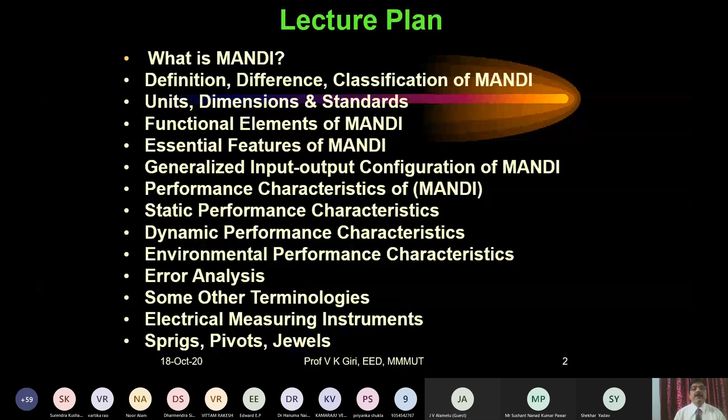Let's start with what is M&I. If anybody asks what is measurement and instrumentation, this is the very first question coming. Or define measurement.

Define. First of all, because throughout our life we have come across, I don't know how many things we have defined, and we have crammed those definitions. How to define the definition? What is the definition of a definition? This is my first query.

How to define definition? We are talking about so many definitions. We were busy with this since our school time. So definition, what I come to this conclusion, is a universally acceptable sentence or non-controversial sentence or paragraph, is known as a definition.

A sentence acceptable everywhere. So that becomes important for this subject, measurement and instrumentation.

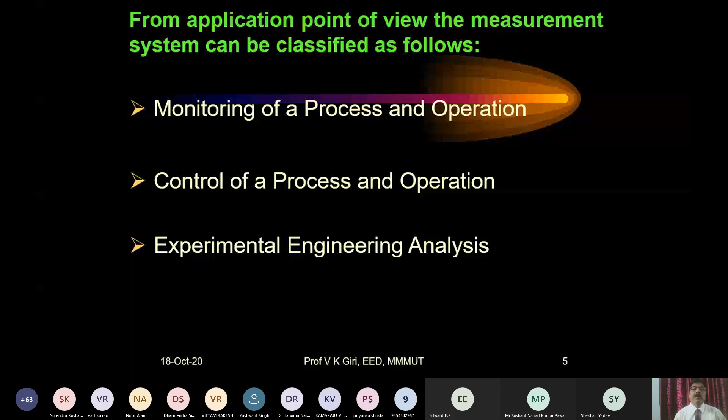From the application point of view, first is monitoring of a process. Monitoring of a process can be explained like this, suppose...

Is it visible? Please, I am checking with the audience. Yes sir, things are going smoothly. A little bit of delay is there, but okay, I think that's fine. So in that I cannot help. Okay, I will try. Otherwise things are visible. Yes sir, perfectly all right.

So this is the monitoring of a process and operation, this is the first classification. See, in some of the applications, monitoring means in your house, what it measures is energy. The energy meter is monitoring the consumption of power over a period of time. How much energy you cannot do anything with that one. Consumption is there, a meter is rotating, and a person comes after a month or two and takes the reading. So monitoring means just you are watching. There are so many terms - when I used to take the class, I used to tell these things. Monitoring has resemblances to observation, watching, monitor, TV monitor. We are monitoring the TV monitor, we are computer...

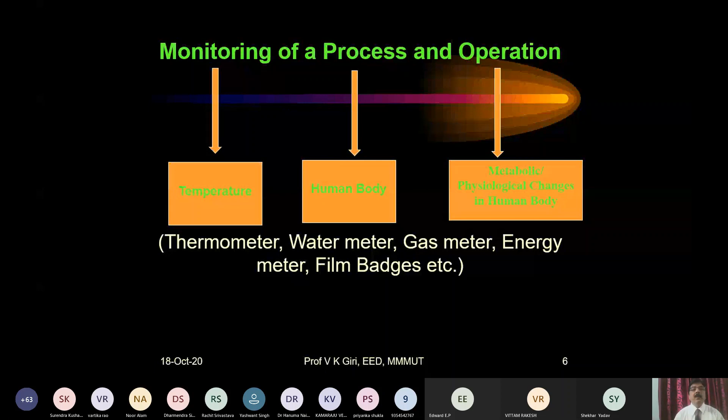Now another is the control of process and operation. As you know, we are mostly talking about the closed loop system. Example - here I have taken the control action of the measuring instrument. Suppose the room temperature has to be maintained constant, or any process temperature has to be maintained constant. So again we will use a temperature measuring device. Here we will be using a thermostat, whereas previously we used a thermometer. So the measuring instrument will be the thermostat, acting like a control device, and there is a process.

Suppose this is the process, so disturbances have to be accounted for, and there will be a set point. As the set point, let us say you have set it at 20 degrees centigrade. Just after 20 degrees, if it goes beyond that, the final control action element will take action, and the compressor will be on or something like this. That is how it will be maintained constant - if switched off, it can be switched on again, so the temperature can be maintained.

So here you see the same measuring device, the temperature measuring device. Earlier it was a thermometer, here it is a thermostat. But in that case it was not doing any control - in the previous case it was just monitoring. Here it becomes control. It's just like daily we watch TV and there is a weather forecast - we get a forecast of the weather. Suppose there is a forecast like a coastal area will have a severe tsunami or something - for us, that is a monitoring process.

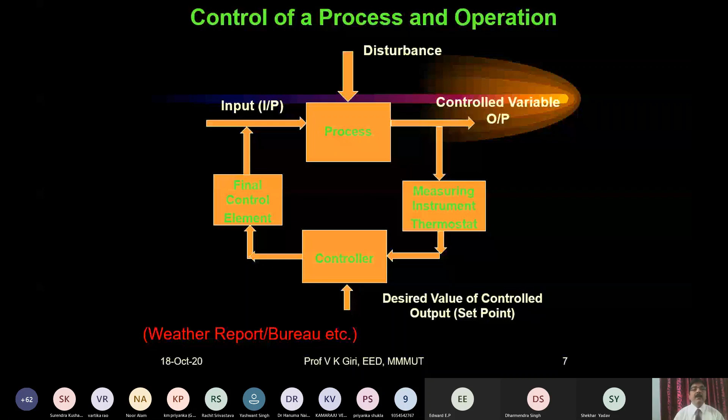Then the third, experimental engineering analysis. This is all about simulation and experimental work, which we call it. So there are two types of approach to solve any engineering problem: theoretical approach and experimental approach. Now always there is a discussion about which should be preferred and why.

So the theoretical approach means simulation. Most of the time nowadays students are doing all the simulation work. The experimental approach has its own advantages and disadvantages. The best problem solver is the person who...

If you could have developed the experimental model of this one and then gone for the simulation, it could have been a very good work. So this is what it means—both have their own advantages and disadvantages. It's best to consider both things together.

For some things, there is no other option, like determination of yield point, friction factor, or speed torque characteristics. So there you have to go for the experimental approach.

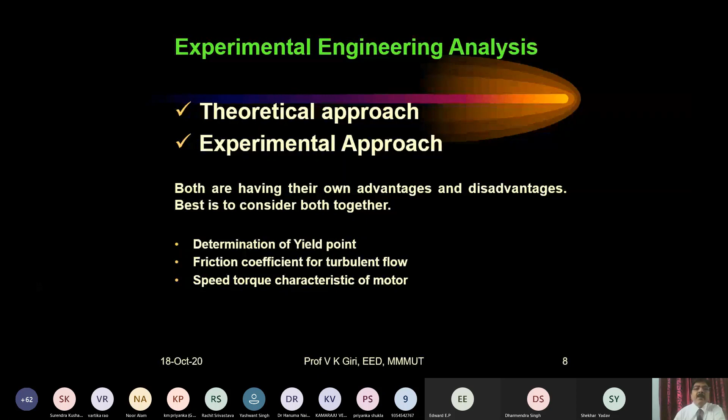Now switching over to the types of measurement, or methods of measurement. Again, this is coming under classification. There are two types of method.

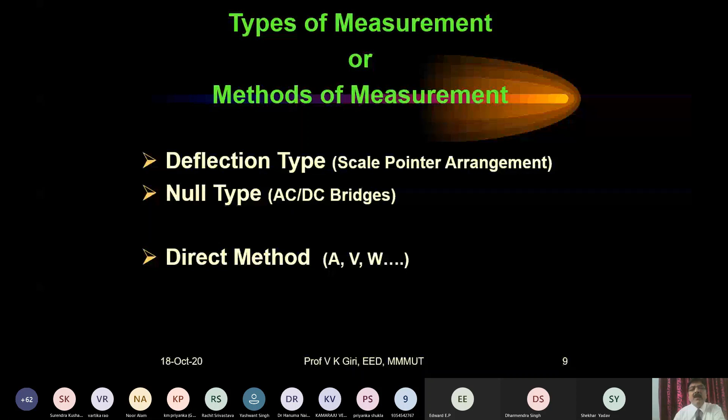Null type method means AC/DC bridges. I will not go into detail because you are all professors and you are dealing with the direct method and indirect method. These are the very local methods of classifying the measurement or methods of measurement. The direct method and indirect method—it's obvious, using a formula. So I will just focus on those things which are needed.

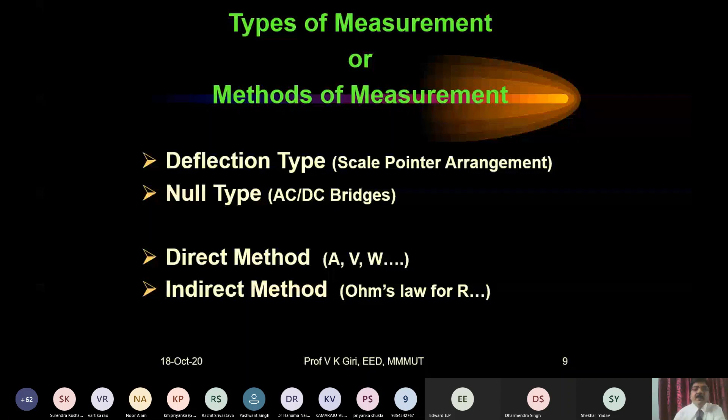One thing—units are an integral part of M&I. I don't know how many marks we have lost throughout our life, from schooling days to engineering studies and postgraduate studies, just by not writing the units. This is a problem for everybody's life. I am very much sure that everybody has lost some marks because it's up to the examiner's mercy.

If you are not writing the units—suppose 240, it may be volt, it may be watt, it may be ampere, it may be anything—so it depends upon the examiner whether he accepts it or not. So units are an integral part of M&I, and M&I is not the copyright of electrical engineering.

Now there are two types of units. These things are well known to you. Fundamental units—there are 7 types, everybody knows. Those 7 are... earlier we started our study with MKS, CGS, or FPS. There are 3 only. Then if you are an electrical engineer, 4 will serve your purpose—the MKSA system, we call it.

But to cover all the disciplines of engineering or science, we need to have 7 fundamentals, and those are length, mass, time, current, luminous intensity...

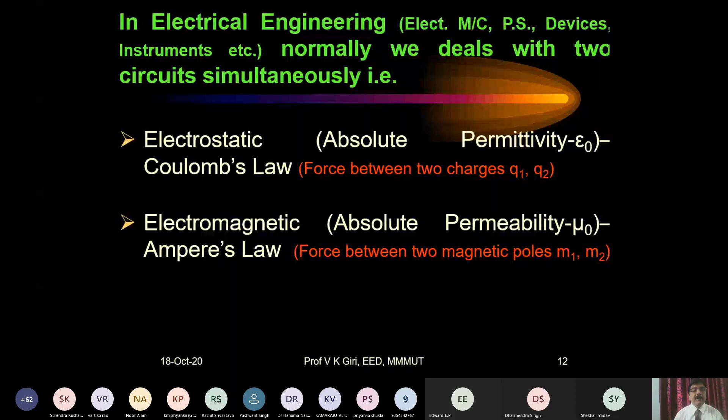There is a very important finding, the Einstein equation, which is a very important link to switch over from electric to magnetic. EMEC is one process, electromechanical energy conversion, so from electrostatic to electromagnetic or vice versa, as in motor and generator action. We need to switch over from electrical to magnetic, electrostatic to electromagnetic or vice versa.

So this is a very important link, giving you the dimension. The multiplication of absolute permittivity and absolute permeability is 1 over c square, where c is the velocity of light, which has dimension Lt minus 1. Lt minus 1 is the velocity, and this is a very important link, and that is how we are able to find out the different dimensions.

Sir, there is a problem, excuse me sir, there is a problem in your voice, there is some delay. Shall I switch off your video? If you switch off your video then I think it will be fine. Let me try. I have switched it off now. Yes sir, no it's fine sir. Let us continue.

Okay, let me share it again. Sir, the PPT is visible. No, I stopped that. Is it visible now? Yes, sir, it is visible. Is there any improvement in the lag? Yes, sir, voice is clear now, okay.

In this, what can we do, Shekhar? I think this is not at all my fault, sir. Network issue, sir. So it's okay, should I continue with this? Just press F5, sir, that I will be doing. Okay, sir.

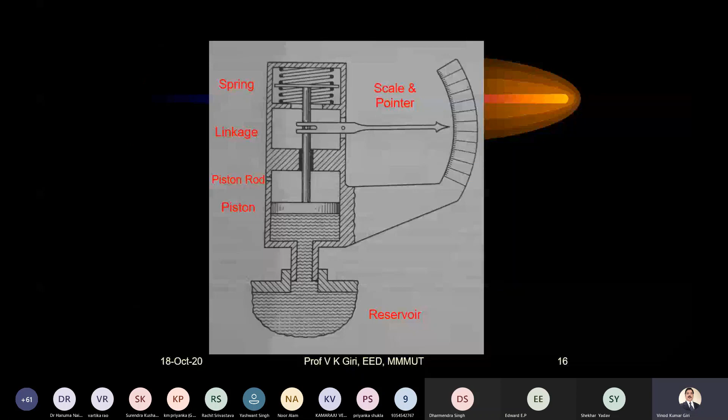This, I think most of you may be knowing. This is one example I will be giving here, just to know, this instrument is known as a pressure gauge. It is a very compact instrument. If we are interested to measure pressure, what we will be doing is dip this instrument, which is just like a bulb in size, a 100-watt or 60-watt bulb, into the reservoir whose pressure has to be measured.

So that pressure will be exerted on the piston, then the piston will move. The pressure will be converted into force, because the pressure has been applied on a certain area. Because of that force, we transfer through the piston rod, and then again it will compress the spring. So there will be a conversion here because of the piston rod. Then the piston rod will be data transmission. Then it will compress the spring. You know the spring action, if it will compress the spring, it will decompress also.

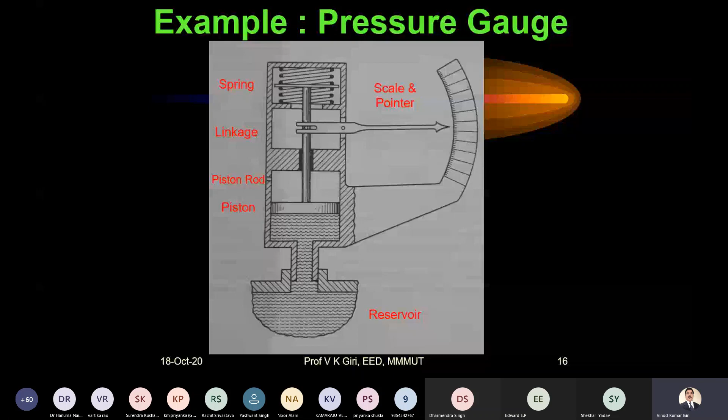So it will be decompressed, that means the linear movement in this will appear on a broader level. It will be magnified and appear in a wider sense over a scale and pointer which has been calibrated in terms of pressure. So this is the example of how to fit those elements in this. As I told you, first and last will be there, primary sensing element. But you see the piston here, measurand means quantity to be measured. What was the quantity in this case? Quantity was the pressure, so pressure will be the measurand.

First element which comes in touch of that - the primary sensing element will sense it, and then it will change the conversion of the element, meaning pressure has been converted into force. Then conversion will take place, linear motion will be there because of the thrust of that spring, and linkage will give you the manipulation. It's some sort of a gear arrangement, and then there will be data presentation, either a scale pointer, digital display, a recorder, a transmitter, or anything. So this is now the generalized input output configuration.

Here I would like to tell you that generally I told you it is a cause and effect, SISO system, but in real practice it is not. There are three types of input: interfering input, modifying input, and desired input. Because of these three types of input, there will be a single output. So the actual system is not SISO, it is MISO, multi-input single output system. This is what I wanted to introduce here.

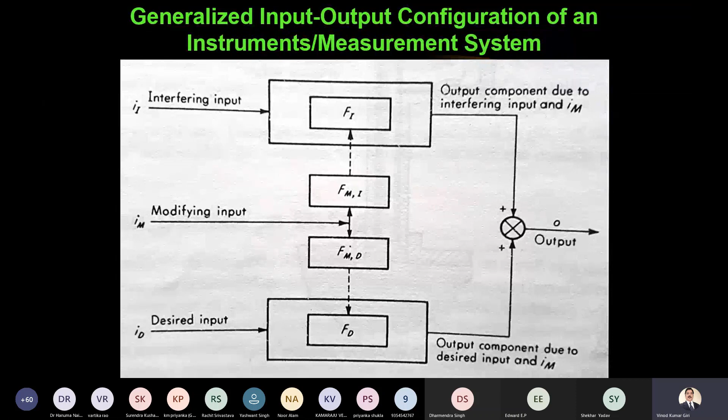There are three types of unit inputs, namely desired input, interfering input, and modifying input. Desired input means those inputs for which the instruments are made intentionally sensitive - we have deliberately designed our instrument to be sensitive for the desired input. Now, interfering input are those inputs for which the instrument is unintentionally sensitive. Like in the beginning, I gave you one example - actual current is 5 ampere, but because of temperature change, it may be giving less than 5. That is giving you an interfering input, and because of that my instrument is unintentionally sensitive.

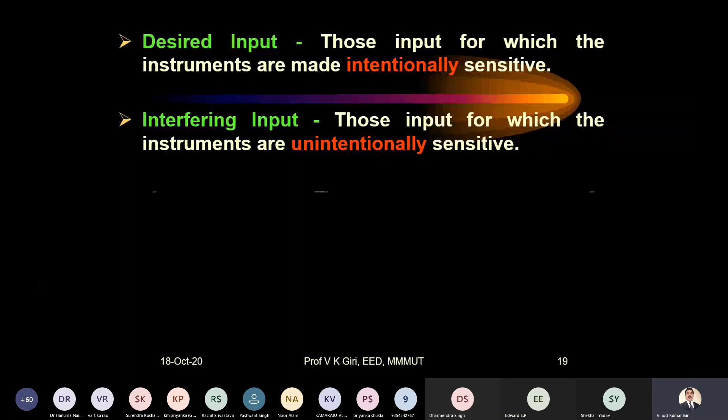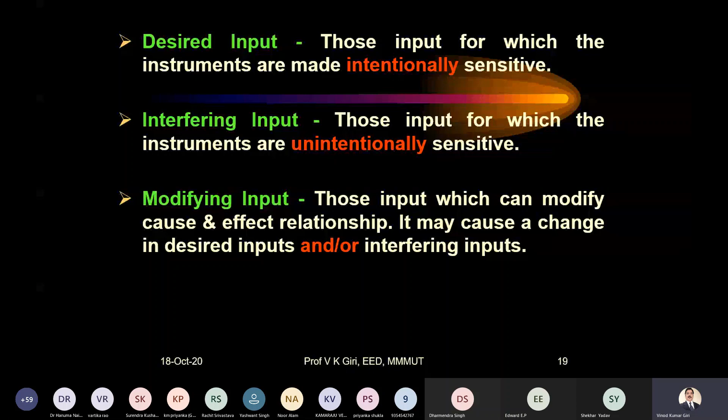We don't want our instrument to be sensitive for this, but unfortunately it is sensitive to it. Then the last is modifying input - those inputs which can modify the cause and effect relationship, meaning there is an equation coming out finally. It may cause a change in the desired input and/or interfering input - it may change the desired input, or it may change the interfering input, or maybe both. What is the final effect of this? It will modify the equation itself, which we generally don't consider. So there is a situation like this - that is the MISO system which we are dealing with most of the time.

And these are the mathematical operations which have been denoted there, FD. I would like to just explain within a few sentences that FD means it may be a constant number that gives the proportionality constant relating the input and corresponding static output, for a linear instrument.

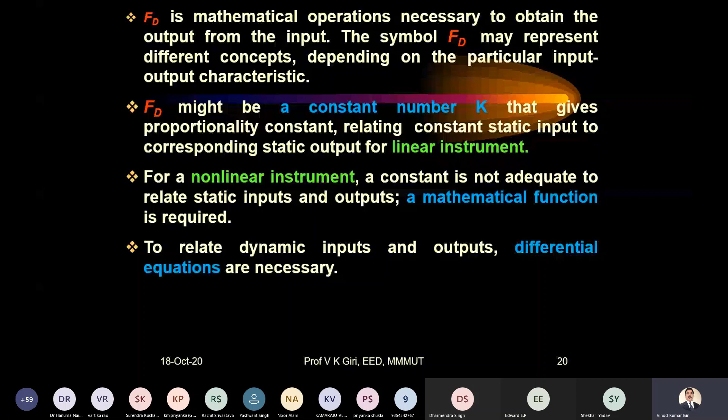Like suppose if you are dealing with an amplifier, it has some gain - suppose 1000 gain - so if you apply 5 millivolt, it will give you 5 volt. That's quite handy, so it's linear, meaning just a constant is sufficient to deal with it. For a non-linear instrument, a constant will not be adequate - it requires a mathematical function, maybe a quadratic equation or something like that, to relate input and output. Or if dynamic inputs and outputs are there, a mathematical function or constant may not be sufficient - you may require to deal with a differential equation. That is what we do in control systems and in instrumentation also.

So I don't want to elaborate on these things further - I would like to give you one example. Suppose in this very example, there is an instrument known as electric resistance strain gauge setup. Here the purpose is we are interested to measure the strain applied to that test specimen. Suppose a force is applied - there is a strain gauge pasted on that test specimen. Normally strain gauges are very delicate, helical, so that is being pasted, and that works just like one arm of a Wheatstone bridge. Everybody knows the Wheatstone bridge - it's a DC bridge. Then the measurement is carried out in a 50 Hz AC field atmosphere.

So the process is like that when no force has been applied, there's no change in the RG, no strain will be there, so there should not be any output. E0 should be 0. But as soon as we apply the force, tension, there will be a strain, change in the RG, and there will be some output voltage corresponding to the value of the force applied.

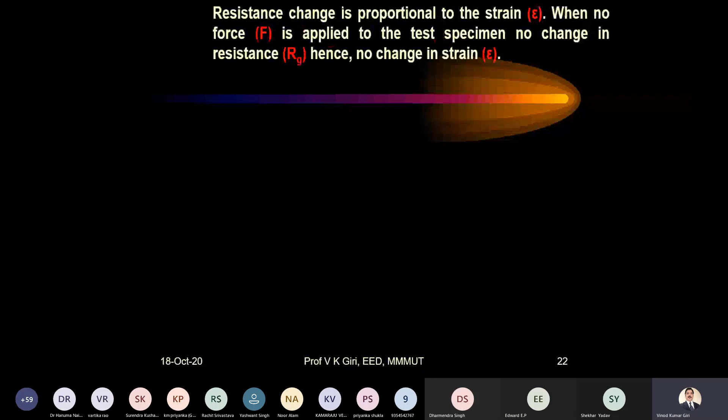So the value of voltage will directly give you the idea of force applied, because it is directly proportional to the strain gauge. The formula which gives this voltage is E0 equals GF, the gauge factor, RG, epsilon is the strain, EB is the battery connected in that circuit, and RA is the resistance, so it's Rg plus Ra squared.

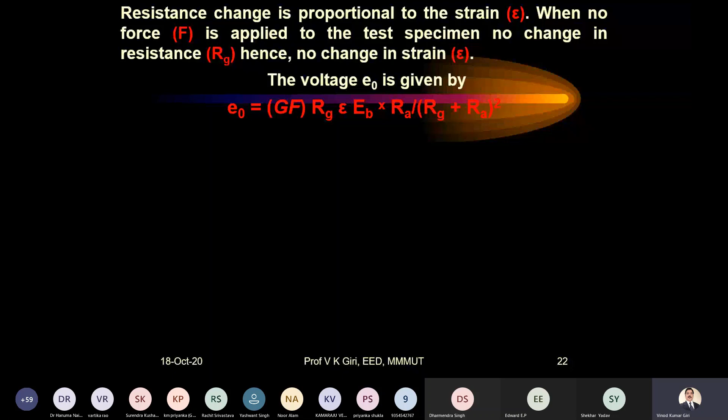This is the equation. Now the question is, what is the desired input? Of course strain is the desired input. We want the instrument to be sensitive to strain only. This is desired, we want this. But interfering input, because a 50 Hz AC field is there, so there will be an electrostatic field, and even then, with no force applied...

What, from where is that voltage? It may be present over there. So in the actual case we don't have any strain, but it is still being picked up. So the interfering input will...

Some disturbance. Shekhar? Yes, sir. I am muted, sir. No, somebody is. Is it better than the previous one after switching off the video? Yes sir, it's very fine sir. Achha.

Then the last one is the modifying input.

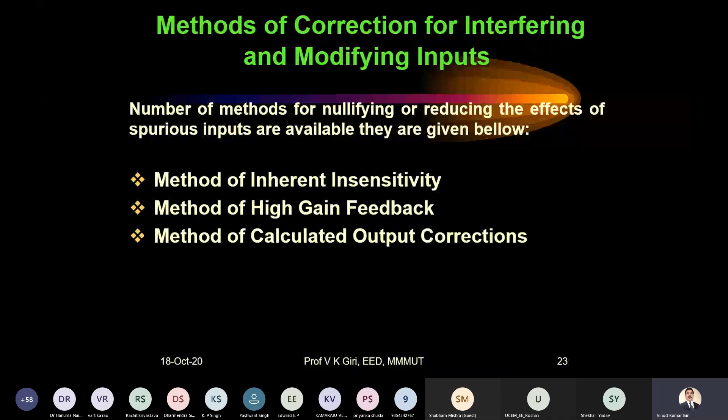Okay, so going ahead with the same thing. As we know there are three, two we don't want, one we want. One means desired, we want that; interfering and modifying we don't want. So naturally we should have methods. Those methods have been named as method of inherent insensitivity, method of high gain feedback, method of calculated output correction, method of signal filtering, and method of... In all these methods different techniques are being involved.

I have some slides but I will just... so it will not be very good from my point of view as well as from you. So this inherent insensitivity means... this is based on the sound design philosophy. High gain feedback, that is another philosophy. In all this, the idea is just how to minimize the effect of modifying input and interfering input.

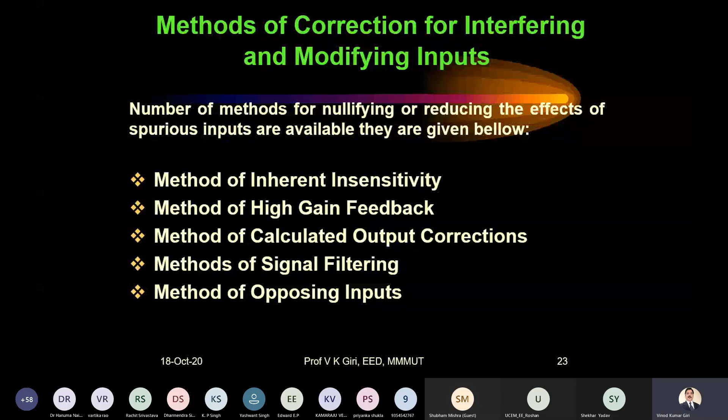So some filtering process, filtering can be done at the input side, output side, or opposing input. Sometimes we deliberately introduce the interfering input in the opposite direction so that it can cancel out the effect. So there are different methods and they are being applied, based on this one, then high gain feedback factor, it can be proved mathematically. Second figure, we have the same system with the closed loop, so the effect can be minimized.

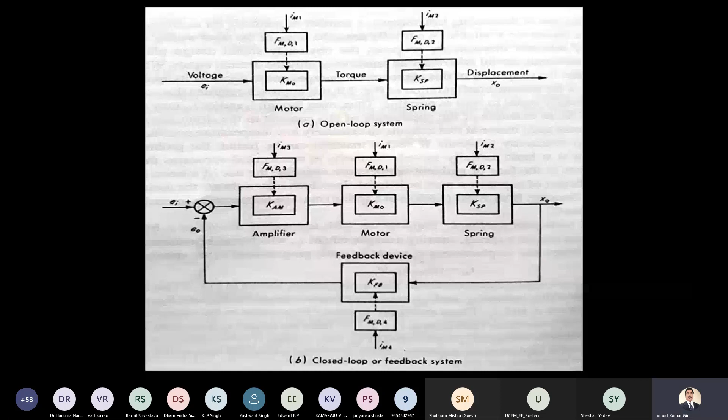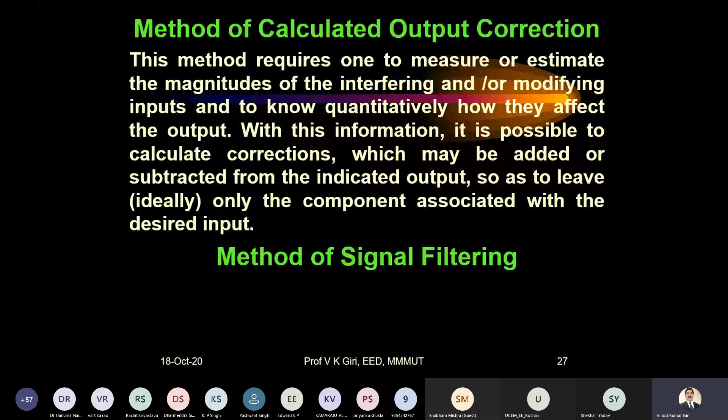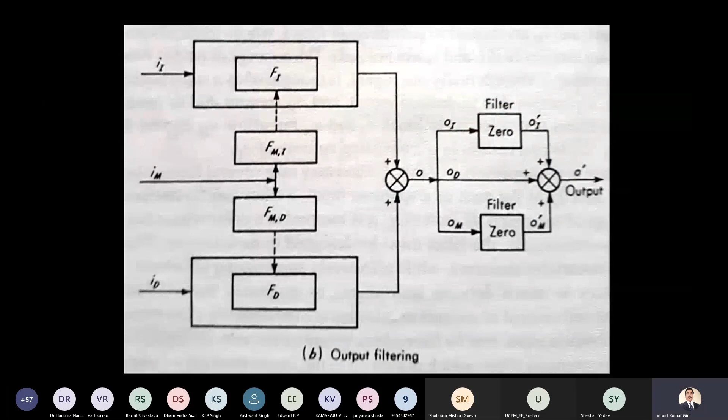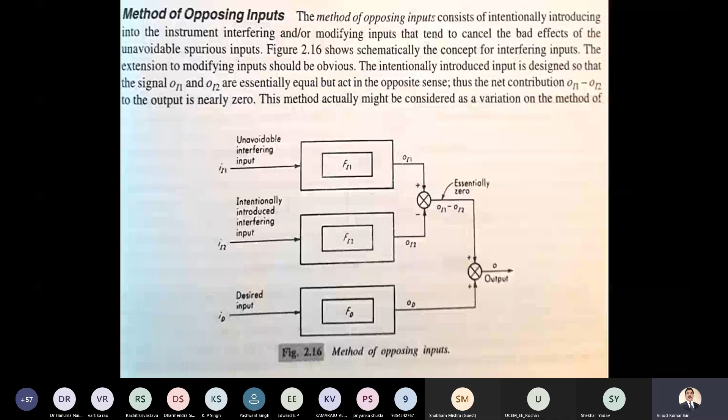Similarly, calculated correction, this also requires knowledge about how the quantity is going to behave. At the input side you can apply the filter; filter means noise, unnecessary things can be filtered out. Then filter can do this on the output side, it is based on the multiplexing, demultiplexing principle. Opposing input, as I told you, is intentionally introduced and it can be cancelled out. Here we must have this idea.

Now this is what I am interested to tell you. The next one—that's why I just switched over very quickly to this one.

There are three types of characteristics: static performance, dynamic performance, and environmental. I will focus and give some deliberation on this, and I request everybody, since everyone deals with this subject while teaching, to follow along as we cover static performance, dynamic performance, and the rest.

Static performance is studied when the input is constant or not varying with respect to time, or held at some constant value. So whatever we study at that time will come under this category.

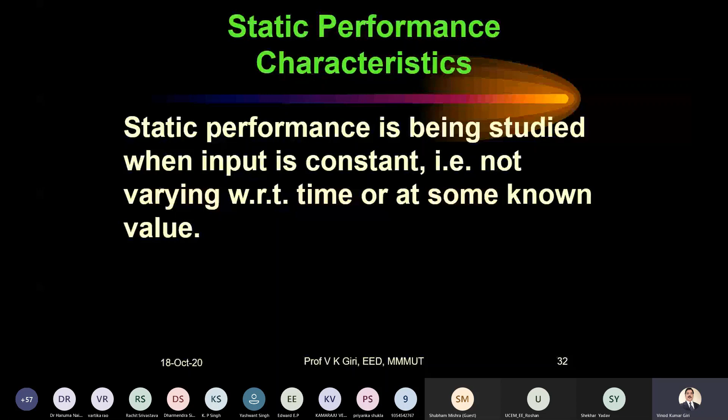The very first thing is range. There are four types of range, and all instruments must be grouped into these four categories: unidirectional, bidirectional, asymmetrical bidirectional, and zero suppressed or expanded scale.

I think you can verify it. In all these cases it is 100 except the last one, where it is 100 minus 20, giving 80. So figures 1, 2, and 3 all have the same span.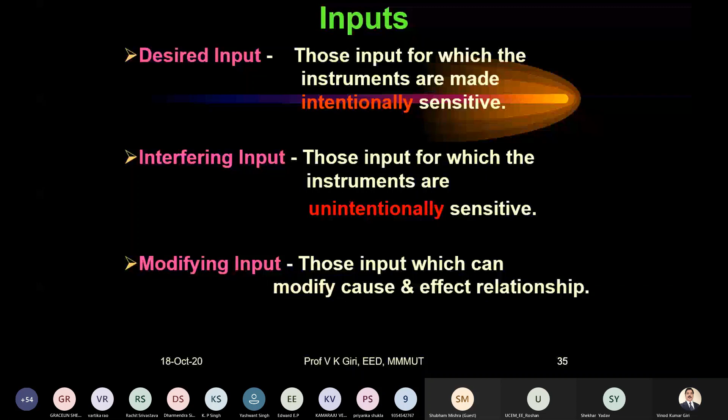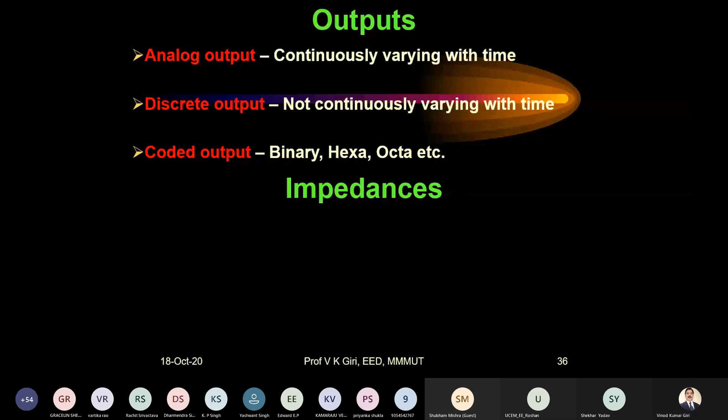Load impedance: input impedance should be as high as possible, and output impedance should be very low. Why? When going through these terms, we must understand them well enough to convey them to students, because there is an effect we call the loading effect—an instrument should not act as a load in the circuit to which it is connected.

So always remember, the instrument being used should not act as a load in the circuit, because that's where it draws its power from. So if you maintain these two conditions—input impedance very high and output impedance as low as possible, ideally zero—then that is what we call proper impedance matching.

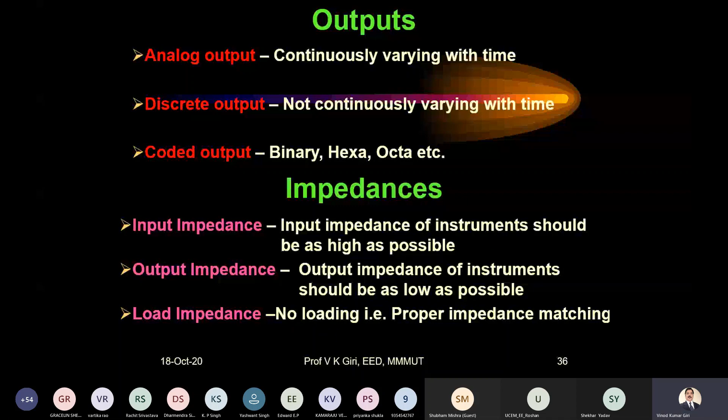So impedance can be of these 3 types. Don't confuse this with the impedance formula Z equals under root R squared plus X squared—that is not the meaning here. These things have entirely different harmonic content.

In this subject, all these fall under static performance characteristics. In a perfectly designed instrument, the information must be contained within the fundamental, while the rest can be in the higher harmonics of the system. So the fundamental should contain 80% in a perfectly designed instrument.

Hysteresis—immediately when this word comes to mind, the figure of the BH curve comes up. But here we have nothing to do with the BH curve.

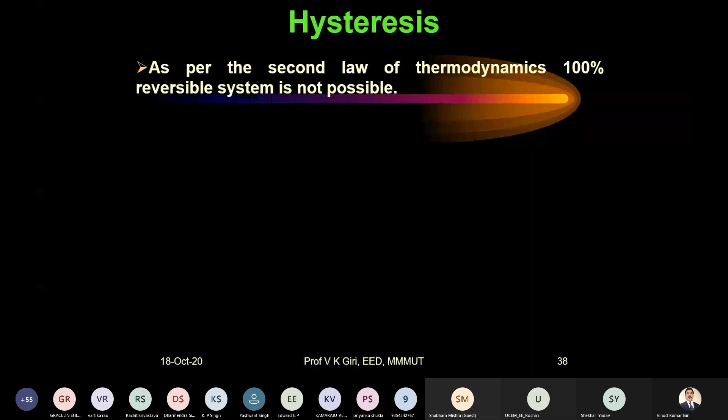Suppose we take an ammeter with a 0 to 5 ampere range. If you increase the current like 0, 1, 2, 3, 4, 5—5 is the full scale deflection. Now bring it down: 5, 4, 3, 2, 1, 0. What's expected is that the path should be repeated, but in actual practice the path is never repeated. There is a small portion where the path is repeated, then it starts deviating from that path.

So the forward path and reverse path are not the same. The action is the same, but the result is not. Why is that? Because of thermodynamics—the second law of thermodynamics states that a 100% reversible system is not possible.

This is given just, it very resembling with the BH curve. That's why maybe this name is given, but it has nothing to do with the BH curve of that. So please don't confuse yourself as well as others.

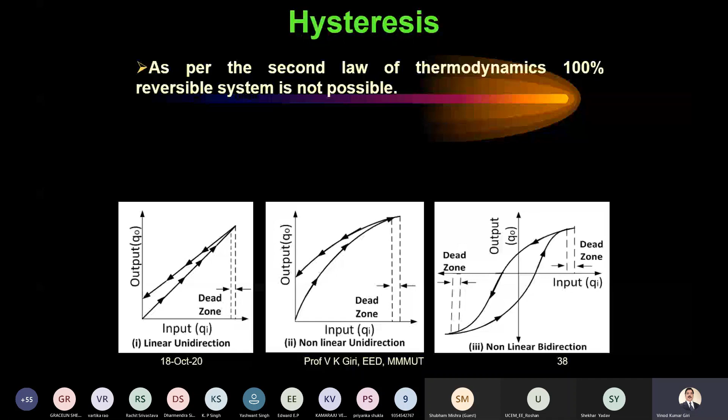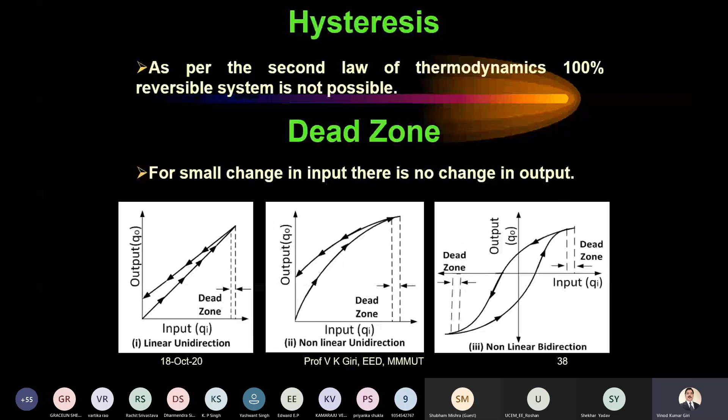Dead zone is very common. For a small change in input, the dotted line zone, there is no change in output. That zone is known as dead zone. There are certain periods where there is no change in the output; that zone is the dead zone.

True value means a standard value. In lab atmosphere, it is obtained differently, meaning we take the average of infinite sets of readings, then another set, another set, and then we take the average of averages, and finally we arrive at the value. Otherwise, it's standard. Whatever is available to you, just deal with that one. That is the true value. Accuracy is closeness with the true value.

Precision is reproducibility, the degree of reproducibility. What is the difference between these? I would like to have a discussion here on accuracy and precision. It is not always necessary that the instrument which is accurate may be precise also, or vice versa. It is not giving you the guarantee that the instrument which is precise will be accurate also. All are different. This example I normally use in my classes because it is very easy and will permanently stay with you.

Suppose instead of instruments we have 3 students, A, B, and C, maintaining a routine for 1 week, Monday, Tuesday, Wednesday, up to Saturday. Now if I ask which one is more accurate, which one is more precise, please participate in this discussion. I would feel happy if someone responds. Please, anybody.

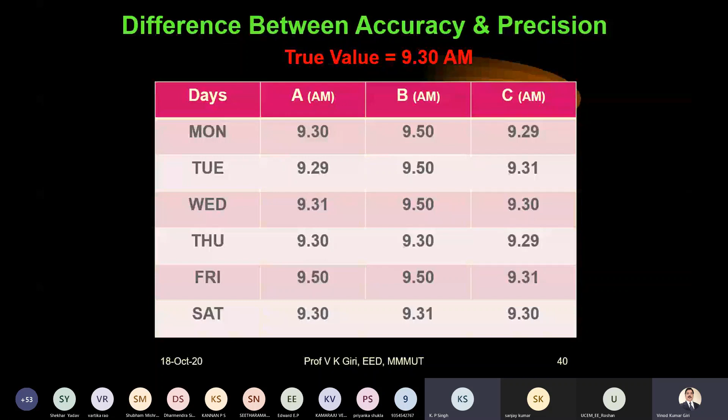Error is measured minus true value. It is normally represented in terms of percentage. Correction is just the opposite of this. I will not give much importance to these things.

Sensitivity is another very important concept. There are two things we can distinguish. If one instrument of the same make and model, suppose a meter of 0 to 5 ampere range of the same make and model is available, and we are asked which one is more sensitive, accurate, or precise, by this time you should be able to distinguish the difference. Now, out of A and B instruments, both 0 to 5 ampere, same make and model, which one is more sensitive? It is not at all related to accuracy and precision; it is entirely different. It is defined as change in output divided by change in input, which is defined as static sensitivity.

So to emphasize this, the best instrument is the one dealing with, suppose I have two instruments, 0 to 5 ampere ammeters. One gives a certain deflection for a certain current, and B gives a 60-degree deflection for 2.3 ampere current. So which one is more sensitive?

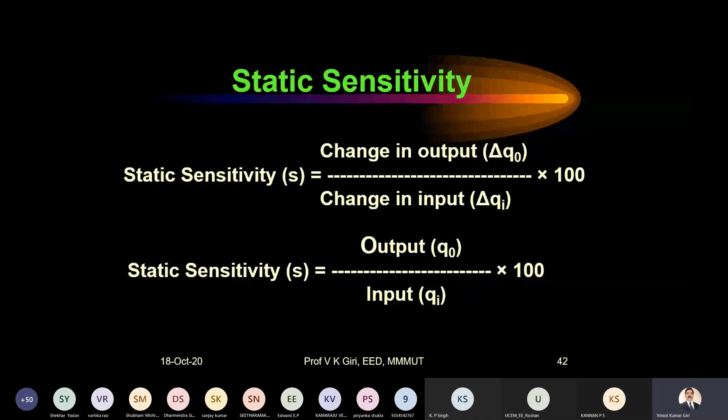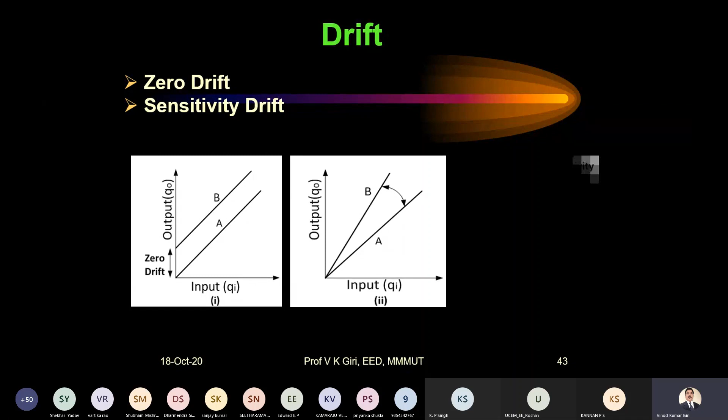Resolution is the minimum or smallest quantity which can be measured with certainty - that is the least count an instrument can have. So this is also very important. Then there is uncertainty, because if you are having a least count, the instrument will have its limitation, say plus minus 0.1 volt - in between that reading cannot be read. So there is a formula designed for this, where overall uncertainty is propagated in the compound quantity. This is very, very important.

My dear friends, one more thing - when we think this subject has no use in industry, don't consider that. This sensitivity, preciseness, accuracy, errors, uncertainty, and all this - they become very, very relevant when uncertainty is propagated in a compound quantity.

I am giving you an example. When you are dealing with space technology, aircraft technology, or other technologies, we deal with these things too - I also work in the same area, but today I am dealing with the fundamentals. So don't take these things with respect to the lab or industry, because in the lab, whether the current value is 2.5 or 2.3 or 2.6, it is not going to affect much.

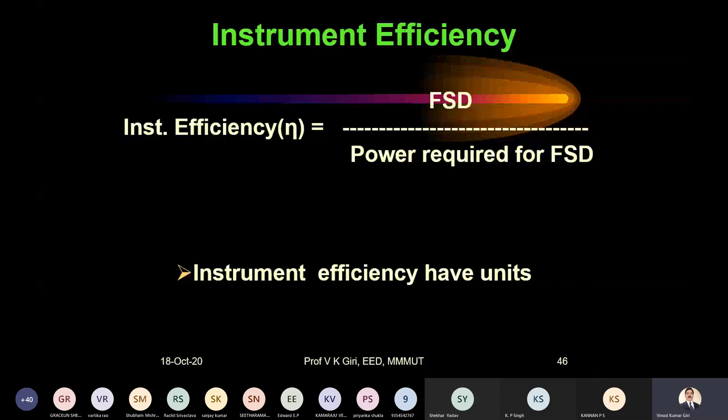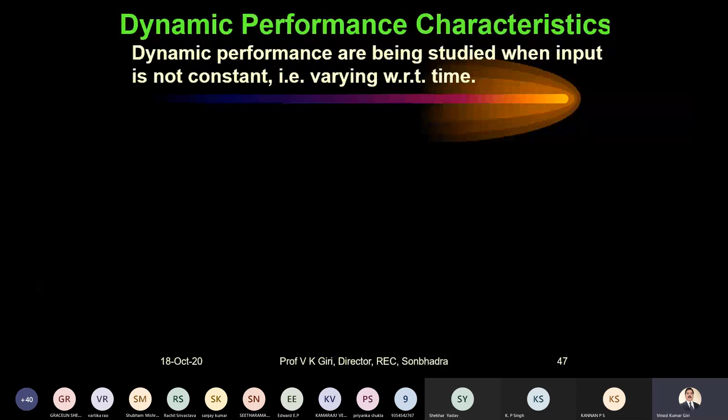Now, dynamic performance characteristics, because control systems suit much of this. So I have covered around 20 topics related to the terminology of static performance characteristics, and this must be understood in the same manner. The problem is not that—it must be fundamental within yourself also, this dynamic performance characteristic. I will just go through this quickly because people are very expert in this. So there are two types of analysis in control systems and instrumentation, both very much related to this.

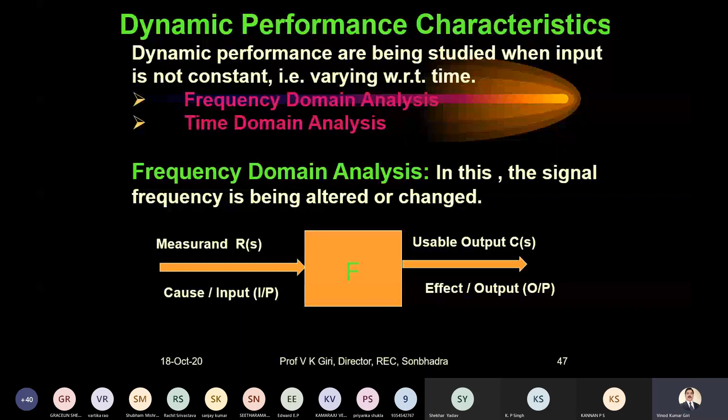So, frequency domain analysis and time domain analysis. In frequency domain analysis, I will just show you this: there is a measurand and usable output, R(s), C(s), cause and effect, same thing. In static performance characteristics, it is studied when the input is not varying with time, or is constant or a known value. Here, for dynamic performance characteristics, the feature of frequency domain analysis is the transfer function, which is output over input. Transfer function means sensitivity—if it's a linear system, it is sensitivity.

So if you are knowing the things, know with the authority, so that you can dictate the terms. Transfer function of the given example: F(s) is C(s) over R(s).

If S is replaced by J omega, that becomes the polar representation, and rectangular representation is also possible. Then there are A and B, where A is the real part and B is the imaginary part. These are all very basic terms.

Amplitude versus frequency, phase angle versus frequency - this is the Bode plot. Then we deal with another analysis which we call a polar plot, that is the Nyquist plot.

Sinusoidal, Laplace transfer function means time domain analysis - operational transfer function. Laplace means you can switch over from time domain to frequency domain and vice versa, because inverse Laplace is possible. So most commonly we use Laplace because there is flexibility to switch from time domain to frequency domain or frequency domain to time domain. Sinusoidal means frequency domain analysis.

So given this situation, we write the general dynamic differential equation for studying the dynamic behavior of the transducer. If we have an nth order system, we can write the nth order differential equation - this is the differential equation, nothing new here. If we replace d by dt with the operator D, we get the same equation.

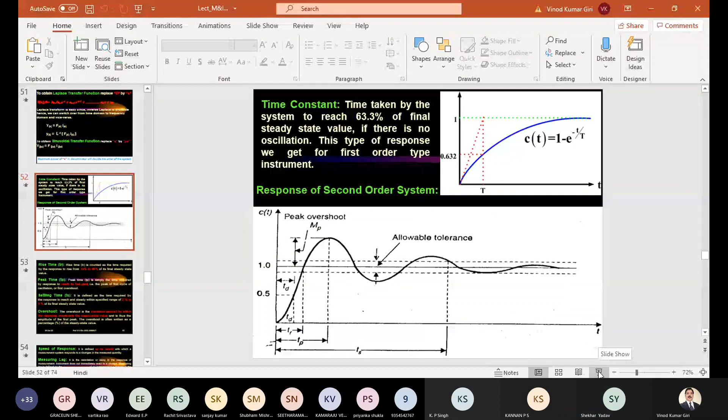Mathematical relationship, because I know my faculties are very much expert in dealing with this differential equation and deriving these transforms. My concern here is what I wanted to deliver is that there are three types - one is operational.

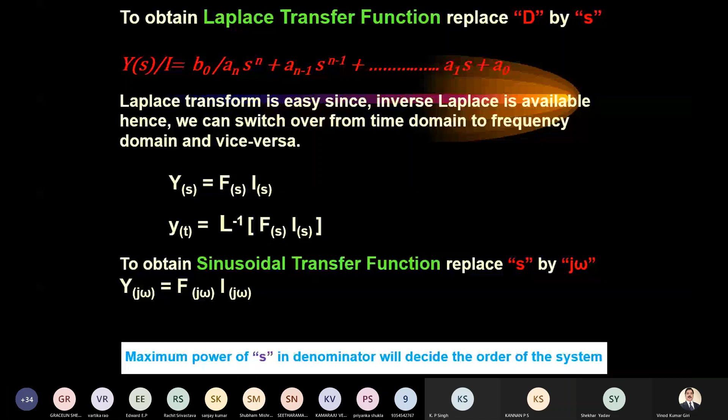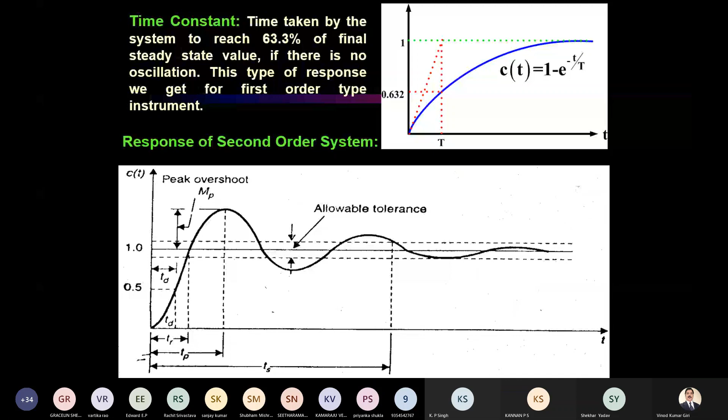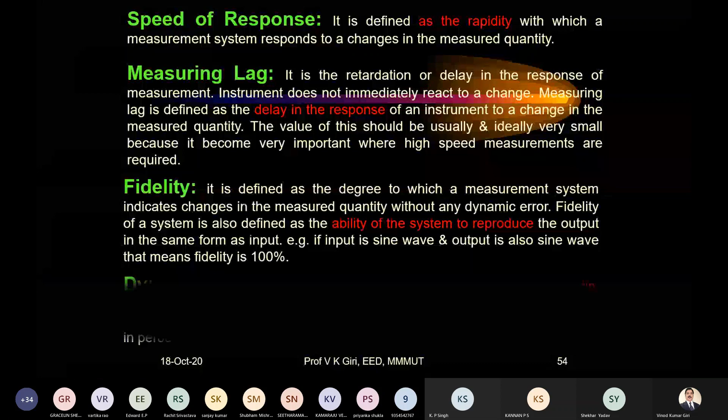It is being preferred because we can switch over from one to another, and there is some other terminology that I will just name, because you people are not UG or PG students, so you all know what is rise time, peak time, settling time. So these are the definitions - I will just go through this one because I have been given limited time, so I don't want to torture you. These are all definitions related to those terms.

Environmental performance - so far we have covered two performance characteristics: one is static performance, and the other is dynamic performance characteristic. Under environmental performance characteristic, the following things are considered: storage, seeping, leakage, and moisture effect.

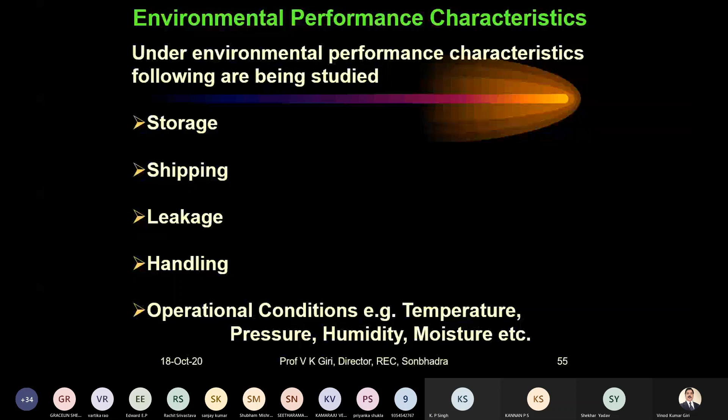This is also very commonly taught to UG/PG students. But my dear friends, I would like to request that please pay attention to errors for electrical engineering students in this way, because there are problems with the books - even standard books like Sawhney and others, the most common ones, nothing wrong with individual topics, but I personally refer to different books, and this lecture is just a collection of the best.

So please try it - error is of three types, and names have been given differently. Systematic error is also known as cumulative error; in some books it may be given that way. Accidental error is given as random error, compensating type of error, or chance error - all can be named possibly. Miscellaneous type is gross error.

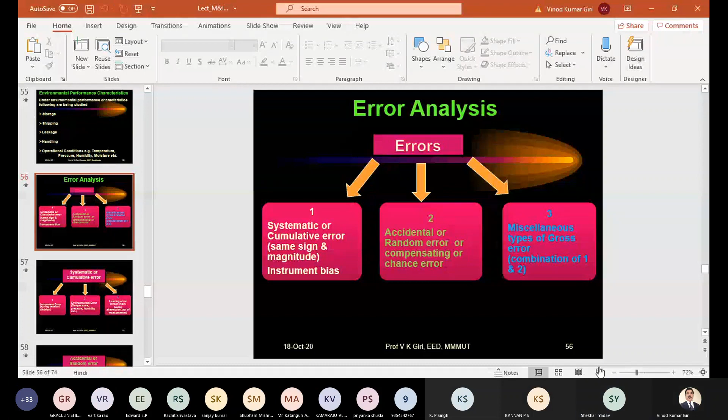So, error analysis. I was explaining these three types of errors. One has fixed magnitude and sign, another is random, where neither magnitude nor sign is fixed, and the third one is gross, which is a combination of the first two. Sometimes it is systematic, sometimes it behaves in a random manner. That combination becomes the third type, gross error.

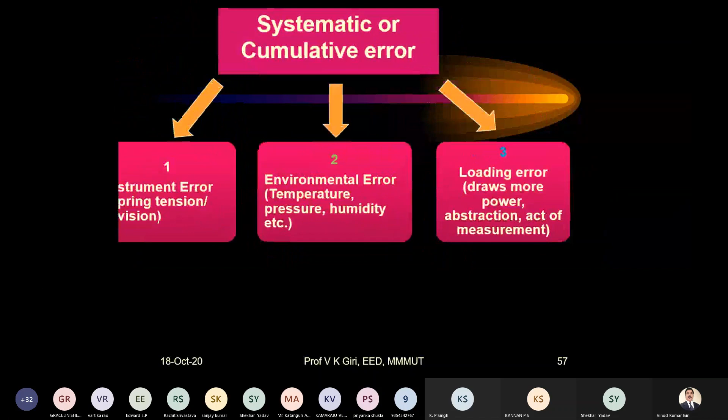Now let me explain these. Systematic error is of three types, also called cumulative, because which is systematic means fixed magnitude. It includes instrument error, environmental error, and loading error.

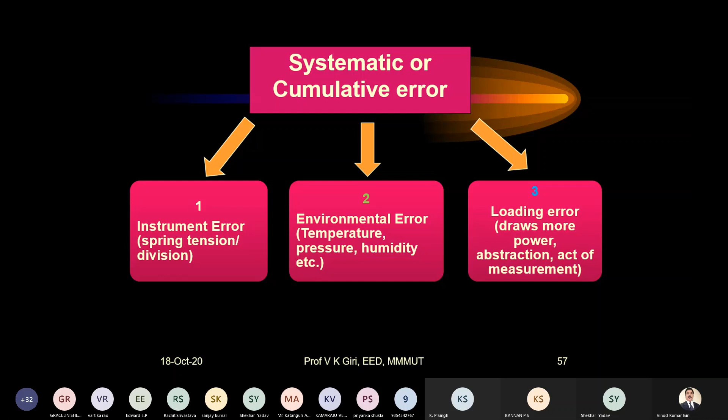In all these cases, it has the same fixed sign, so they are cumulative, meaning it keeps on adding because sign and magnitude are fixed. This is better from a measurement point of view because you know what is happening, so whatever the reading is, you deduct that much and get the actual value. So instrument error, environmental error, and loading error are part of systematic error.

Another type is accidental or random, where neither the magnitude is fixed nor the sign. These occur because of three reasons.

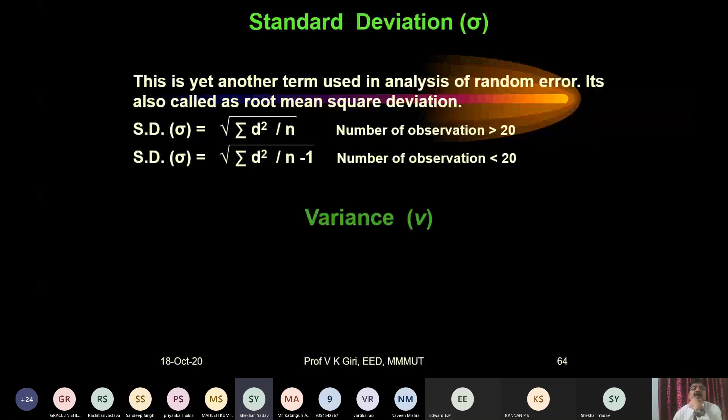These things are well known to everybody. Normally we go for the average, then standard deviation, then variance, nothing much to add. I'd like to say a line or two about median. Median is important because of what happens when multiple samples are taken. Normally in the lab we take 5 readings and take the average of those.

That will be the best reading. This is what is normally done. But if the readings are being collected from different places, then because of the mistake of one center, the average will be deviated a lot and will shoot out, giving an altogether absurd value.

Are you getting it? Suppose data has to be collected from 5 countries, say Singapore, Delhi, Chennai, New York, so there are 4, 5, 6 stations. Suppose one station has abruptly given an unexpected reading. In that case, average will not be a good solution, so we go for the median.

In median, we arrange the values in ascending order and take the middle one, so the odd reading gets automatically excluded. If the number of samples is odd, take the middle one; if it is even, take the average of the two middle values. So median is a very important solution for this.

Now I will not go through this further. I would like to conclude with one very important aspect which people normally don't give importance to.

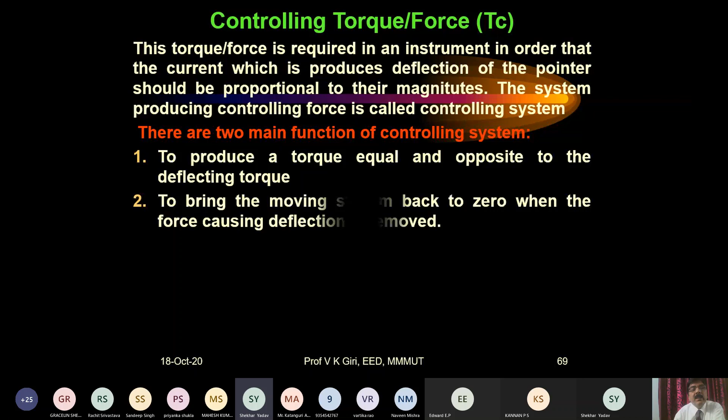In most colleges, especially new colleges, digital instruments are preferred most of the time simply, but it is not preferred whenever there is a sophisticated application like aircraft technology, space technology, or missile technology.

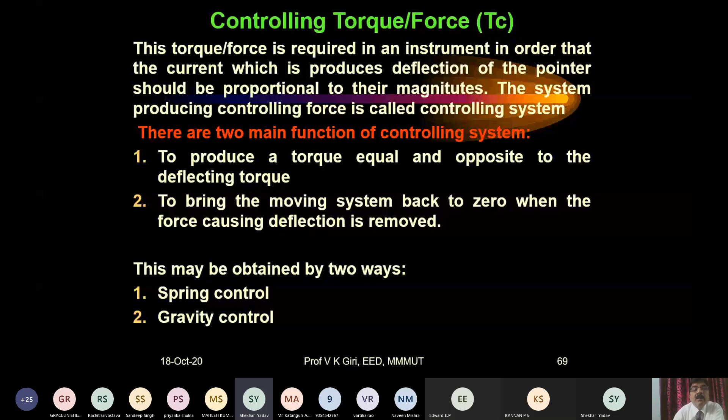If you see the cockpit of an aircraft, you might have noticed all those meters are there. They are all basically analog instruments. Digital display is very popular nowadays only because it is cheap, and another thing is readability is very good. If something is cheap and easily available at low cost, it becomes popular. Otherwise, as far as accuracy, precision, sensitivity and all those terms are concerned, there is still no match in present day technology for those digital instruments, especially compared to PMMC.

So one important instrument part is the spring. The spring is designed in such a way that it accounts for 60% of the cost of the instrument. Take a meter, for example, an analog meter in the lab normally costs 1000, so 600 will be the cost of the spring alone.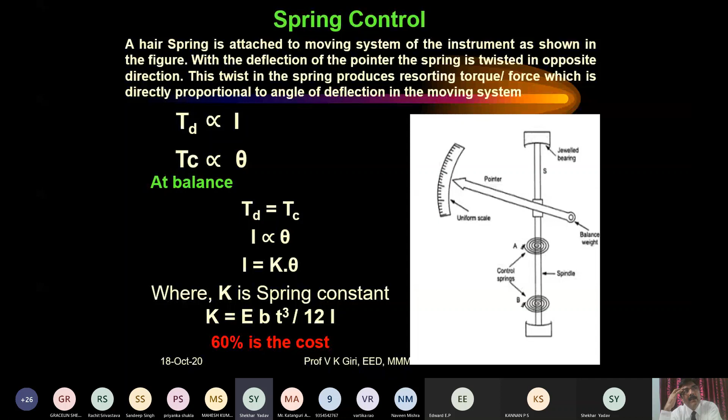The same range meter available at NPL costs more than 10 lakhs. Same range, same thing, also measuring 0 to 5 ampere. So what makes the difference? It is the material and selection. So spring design is one important aspect.

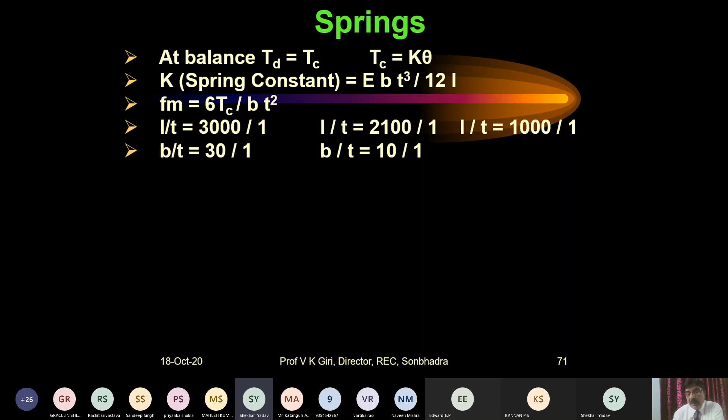In a properly designed spring, the length versus thickness ratio must be maintained at 3000, and width versus thickness should be 30:1. But if you maintain that, the cost will go further high. So to make it economical, we go for a smaller value, 10:1 or 1000.

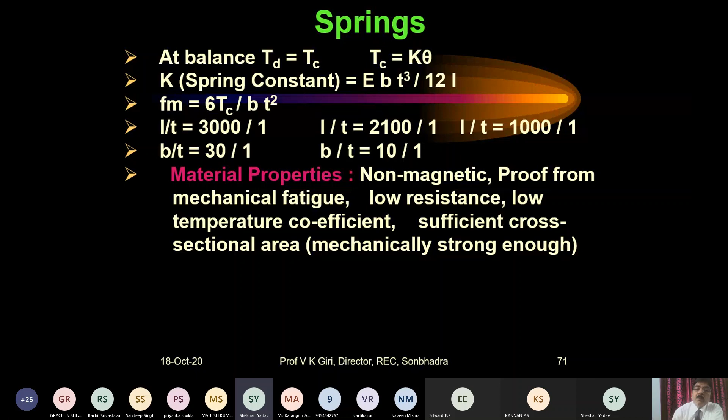These are the material properties, the material names. Phosphor bronze is the most economical. Otherwise, you should go for platinum, silver, or platinum-iridium. These are all very costly.

So now this will be my last slide. Pivot and jewel, we are also not taking much care of this, but if anything is mounted and continuously wearing, there is a Hertz equation which comes into the picture. So always consider the hardness of the material used for the jewel. In technology, all the latest developments or comfort levels are possible because of sensors and transducers, and that is possible because of material science development.

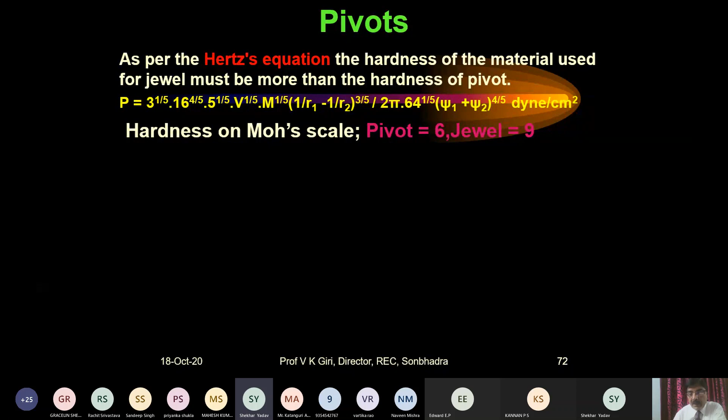If you see this complicated Hertz equation, it tells you that hardness is normally measured on the Mohs scale. The pivot should have hardness 6 and the jewel should have 9. The material used for the pivot is stub steel or silver steel, and the hardness of the jewel should be more than that. The hardest material is diamond, so diamond jewel should be used.

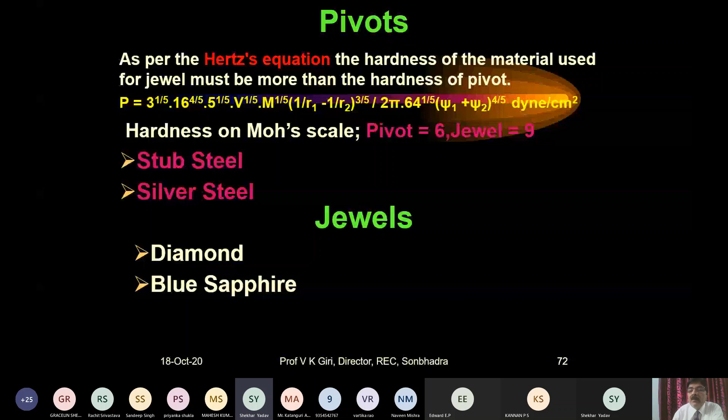Now, if you are using diamond as a jewel for a lab instrument, it is not feasible, that's why. But where you cannot compromise with anything, there we use diamond, and that's why it costs 10 lakhs. Normally we use other materials like blue sapphire or red stone. So I have taken sufficient time, I think, and this is my conclusion.